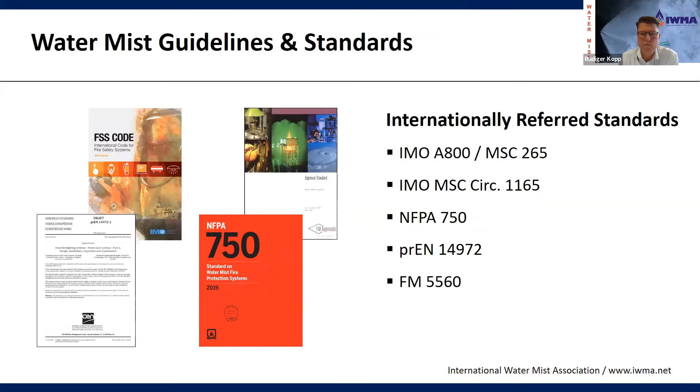Apart from the ones you've seen on the previous slide, other standards have come up, particularly in Germany. The German VdS has published a standard on water mist technology, the VdS 3188, and they just recently published fire test protocol standards and an approval standard, which is called VdS 3883, where similar to the American FM 5560, all the different fire test protocols have been published.

In the US, UL have also looked into water mist technology. They mainly focused on the components, on the nozzle as a particular component. So the UL 2167 standard focuses on testing and certification of nozzles, which are then used in various other standards for marine and land-based application.

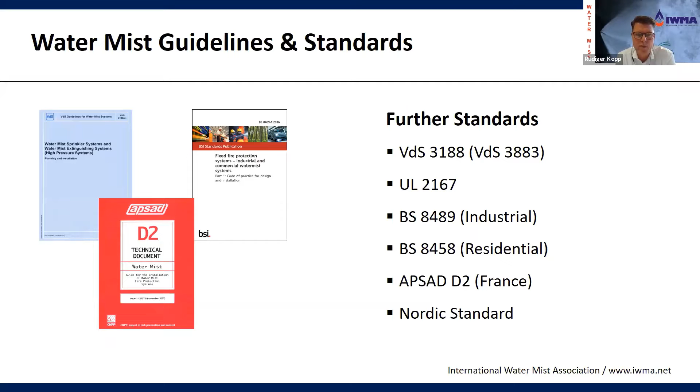And in the UK, the British Standards Institution has published two standards, one for industrial and commercial water mist systems and one for residential, which are also providing fire test protocols to certify, to test, to approve systems too. And the French have looked into this as well as the Nordic countries. So you can see there's a number of standards available today to refer to when it comes to this technology.

However, all these standards have in common that they have a different approach than conventional standards for conventional systems. So for sprinkler systems or for gas extinguishing systems, the standards have been built around experience that is available from the market, from real fires that the systems have performed successfully on. They mainly refer to generic layout parameters, which are either based on a floor area which is protected, so defined by a spacing between nozzles, or by volumes, by a concentration that you generate when it comes to gas extinguishing systems.

Now, these types of technologies very seldom come up with specific fire tests to demonstrate the performance of the system for individual types of risks. This is completely different with water mist technology. With water mist technology, all standards which you have seen on the previous slide do not provide generic layout parameters for the systems. Every manufacturer has to perform full-scale fire tests per individual application to demonstrate the performance of the individual systems on the fires, and to generate the specific design and layout parameters for the individual system.

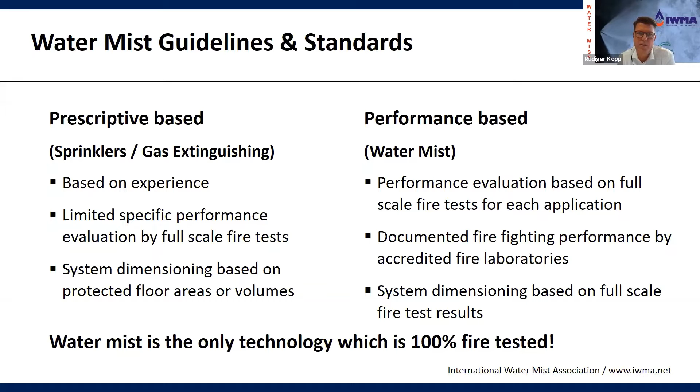But this is also where water mist technology is the only technology where every design that is provided to the market is 100% fire tested. So you have demonstrated that the system is effective on the fire. Now, the certification approach for the systems does include these fire tests, and the fire test protocols can be found in the various standards, which you will see in the following slides.

These fire tests, of course, have to be conducted by a laboratory accredited to the ISO 17025 standard. That norm is referenced when it comes to the kind of approval and certification the laboratory should have. And this is the same kind of standard that the laboratory shall have which, after the fire test, inspects the components that have been used in the test.

So of course, component tests also have to be carried out, like for any firefighting system, to demonstrate that the components are robust enough for the type of environment they are intended for. And this is where a number of different component tests are described in standards I will show on the following slides.

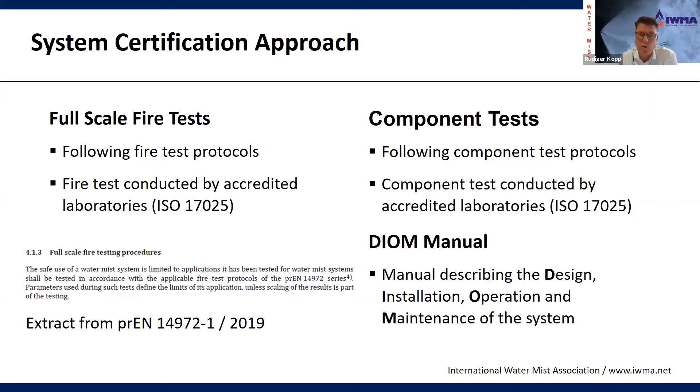And after successful performance of the fire test and of the component test, the manufacturer, the supplier of the system, has to produce a design manual for the system, which is called the DIOM manual. DIOM stands for design, but it also includes installation, operation, and maintenance of the specific system that is provided to the market, to make sure that the system is properly installed and also maintained.

Now, for ordinary hazard type of risk, that means building protection, there are a number of standards on the market which provide fire test protocols, which describe how to conduct the fire test. In these fire test protocols, the type of fire load is described, the arrangement of the fire load, but you will also find acceptance criteria in those. What are the pass-fail criteria for systems?

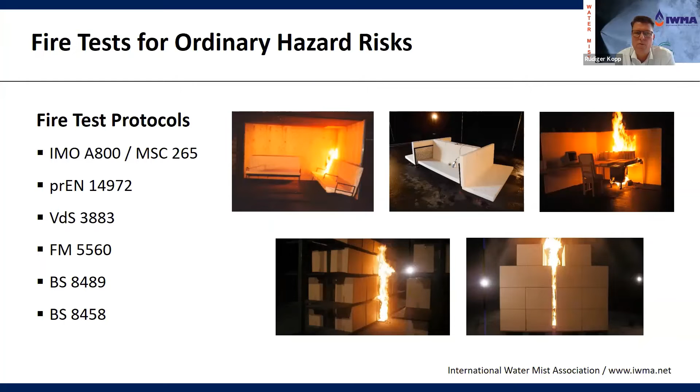And I don't want to read out all the individual standards, which you see on the left side, but you see that very different scenarios are tested. So you have arrangements of sofas with mattresses, like you would find them in public spaces, in entrance areas of buildings, but also in hotel rooms, maybe in hospital areas. And then you have scenarios for offices, like on the top right one, and also for storage areas, different kinds of storage, whether it's a block storage or a shelf storage, and all these different types of risk and arrangement of the risk have to be tested and successfully passed with the system.

And today, a number of applications in the ordinary hazard field, so in building protection, are available with respective approvals. This covers almost everything you will find in office spaces, public spaces, in hospitals, care homes, hotels, heritage buildings, but also libraries, archives, museums. It also includes technical areas in such buildings, and data centers for sure are a key application for the technology. It also includes apartments, and this is where more and more systems are equipped, specifically in Scandinavian countries.

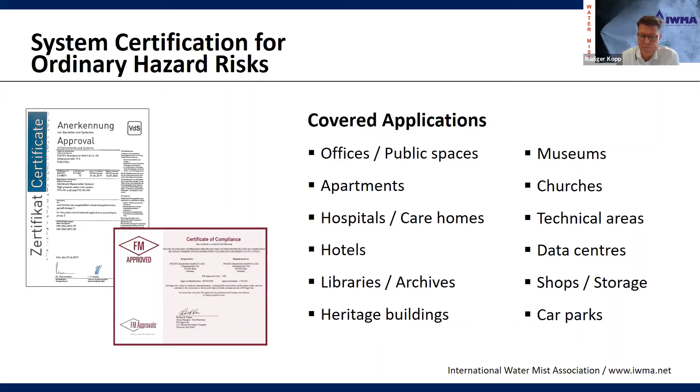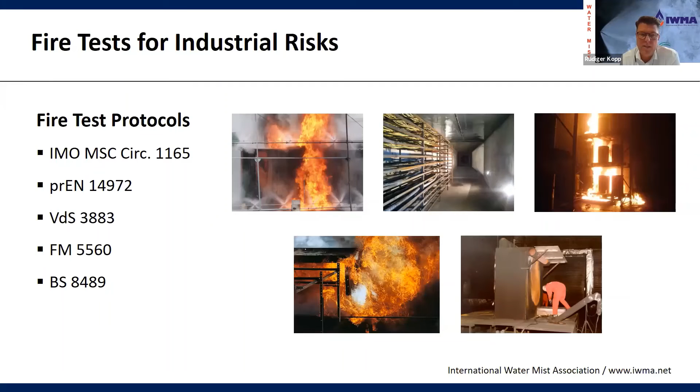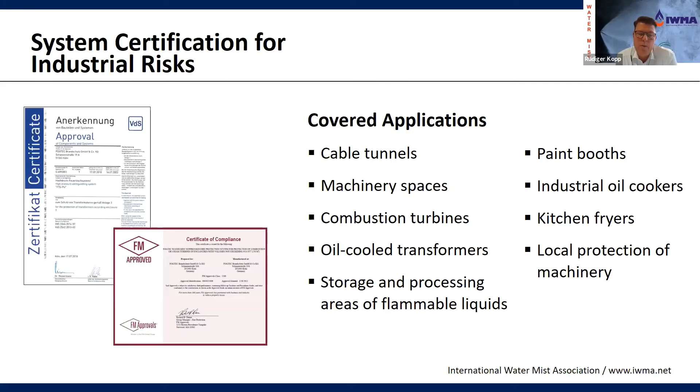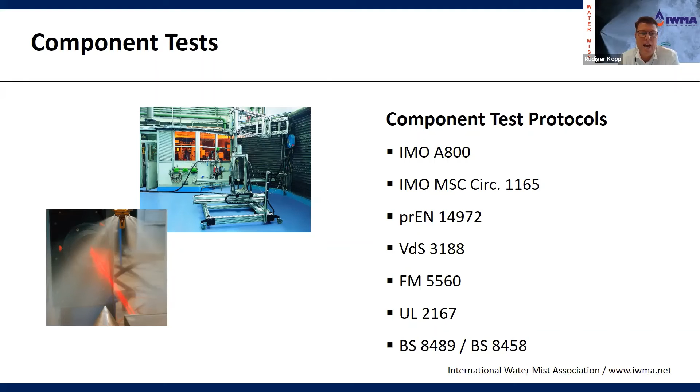The component tests are mainly looking at the key component of the system, which is the nozzle. It shall be ensured that the water mist is generated at the right density, at the right quality at any time when it's needed. And this is where a number of fire test protocols are available within the standards that you find here on the slide. They have different tests for automatic nozzles, glass bulb operated nozzles, and open nozzles. But once all these tests have been successfully performed, a system approval is given for the component. But the nozzle is not the only component tested, also valves, pump units, cylinder systems, they all undergo a verification process to make sure that the system availability and quality is high, and make sure that the system is available anytime it's needed.

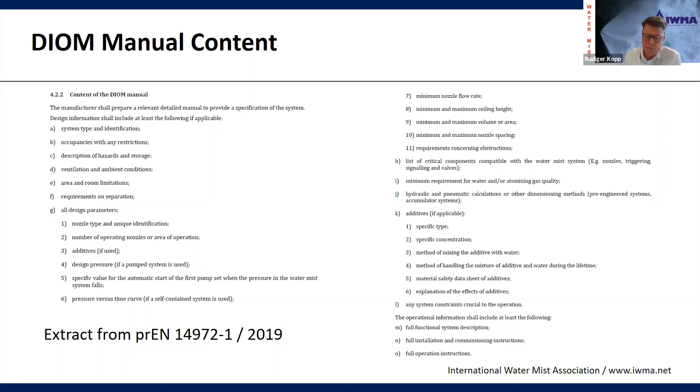The DIOM manual, which I was mentioning, shall contain certain elements. You find on this slide an extract from the European standard, the prEN 14972, which describes what kind of specification has to be given in the manual. And of course, the type of nozzle that shall be used for the individual kind of risk shall be given, but also the installation parameters, meaning maximum installation height, maximum and minimum distance between nozzles, the flow rates of the individual nozzle, the minimum pressure that shall be available at the nozzle. All these details have to be provided, but also details on the ambient, what are the ventilation conditions the system works with, what are maybe restrictions that have to be taken into account, and maybe some additives that have to be used with the system. All of this has to be specified by the system supplier.

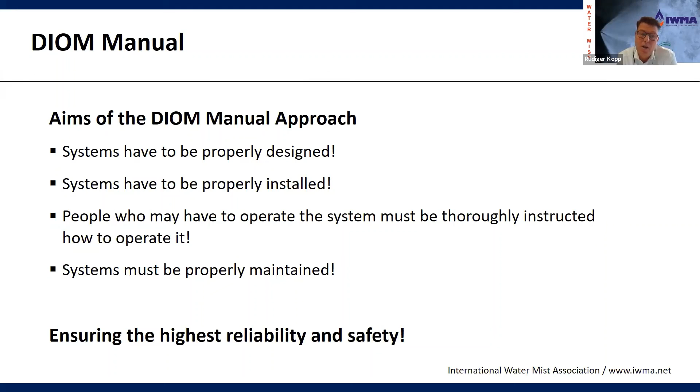And this kind of approach with the DIOM manual makes sure that the systems are properly designed by designers of the system, but they're also properly installed by the installation companies, and they are properly maintained. Maintenance is also key to the technology, like for any fire protection system, to make sure that the system is available at any time. And of course, the operators of the system have to be thoroughly instructed on how to handle the equipment. And this is where the operational part is also a key part in the DIOM manual. And this altogether ensures the highest reliability and safety of the system.